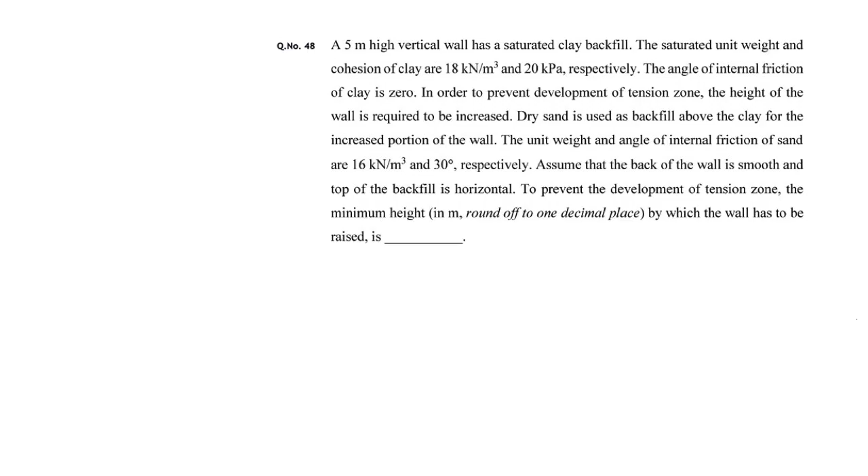Today, let's see a question from GATE 2020, and this question is from soil mechanics, which is a very important subject. But here, I just want to talk about something in general.

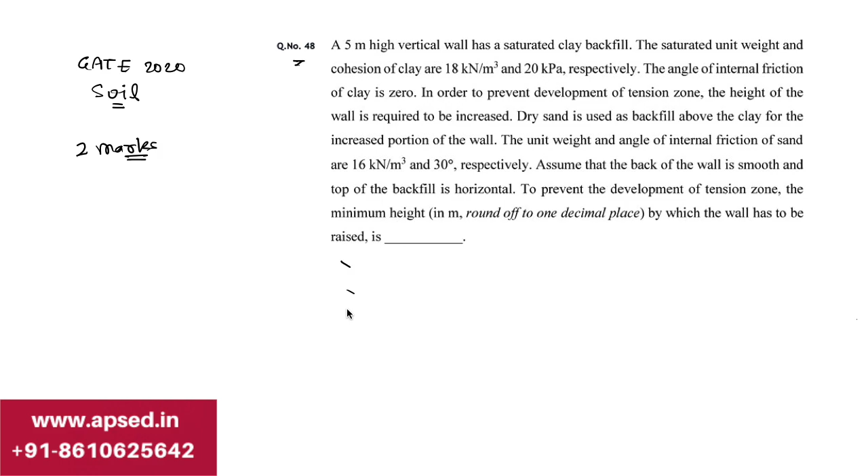The question can be from any subject, but in GATE, if you see the 2-mark questions in general, a lot of these questions are very lengthy and there are no options also to tick from. So these fill type questions that are coming in recent years, a lot of these are very lengthy in nature, and that can be very overwhelming when we are sitting in the exam with immense pressure to solve a lot of these questions.

So to tackle that situation, it is very important that we develop the skill of reading and understanding the question, because such long questions, if you are not reading properly, or if you are already assuming that it is a very difficult question because it is such a large question, any sort of assumption if you make even before reading the question, that may result in lack of confidence or doing some mistake. So that can all happen.

So the very important skill required here is: don't try to read the question in a hurry. Reading the question and comprehending it is a very essential part in solving it. If you have spent enough time reading and understanding the question properly, maybe you will take only a minute or less to solve it. But if you have not read the question properly, the chances are very high that you may end up making a mistake, or you may find the question very difficult.

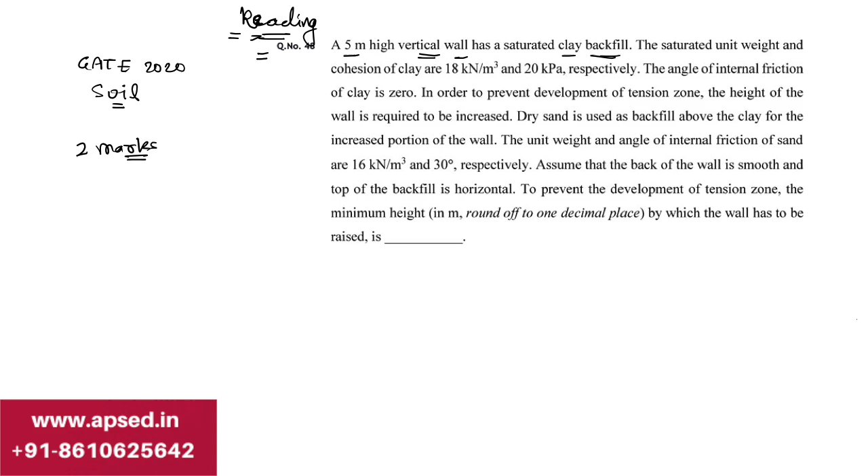So if you have studied soil mechanics, from here you can figure out that this question is from the retaining wall topic. You would know that generally in retaining wall topic questions, a diagram is given, but here the diagram is not given. For solving these questions, drawing this diagram is very important. If it is a question from retaining wall, make sure you draw a rough diagram - it helps a lot in solving the question.

So here it says it is a 5-meter high retaining wall and it has a saturated clay backfill. So the height of this wall is 5 meters and the backside soil is clay - saturated clay. The saturated unit weight and cohesion of clay are 18 kilonewton per meter cube and 20 kPa respectively. This next sentence is just telling us more information, that is the unit weight of this clay and its cohesion. So unit weight gamma is given as 18 kilonewton per meter cube, and cohesion is 20 kPa kilopascal, which is also 20 kilonewton per meter square.

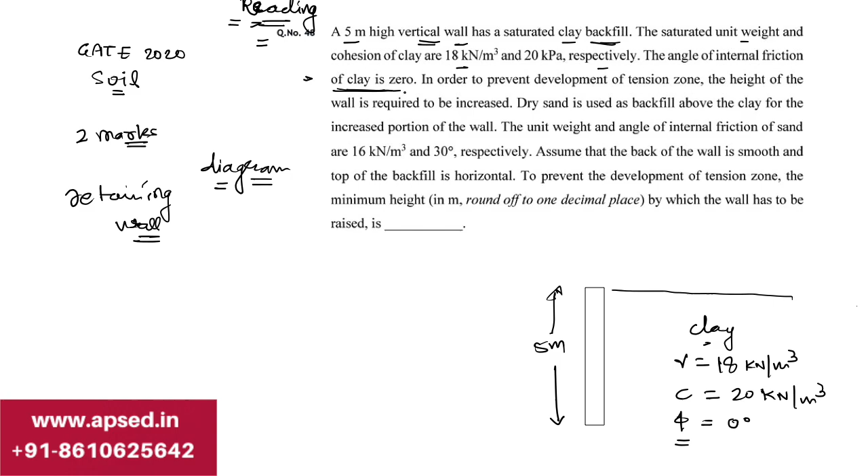The angle of internal friction of clay is 0. Even in general, if this was not given, we would have assumed the angle of internal friction to be 0. But here, this gives this additional information also - this may not always be given. But you can see that if the question is long, it can have such information also. It can be very clear in its language, so you don't have to get scared or intimidated by such questions.

The next line says, in order to prevent development of tension zone, the height of the wall is required to be increased. If you have studied earth pressure or retaining walls, you must know that for C-phi soil, when talking about tension zone, this forms only in case of active earth pressure. If it was passive earth pressure, there would be no tension zone.

This active earth pressure for C-phi soil is given as gamma z Ka minus 2c square root of Ka. This term would not be there if it was just a cohesionless soil. So that is one difference.

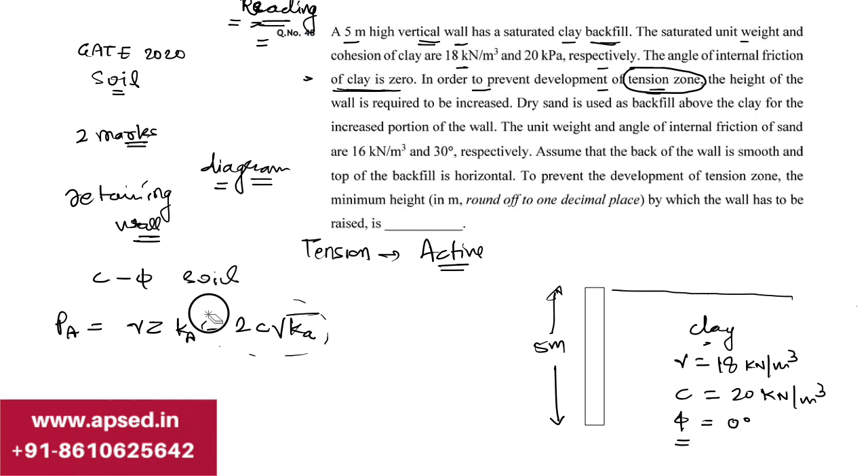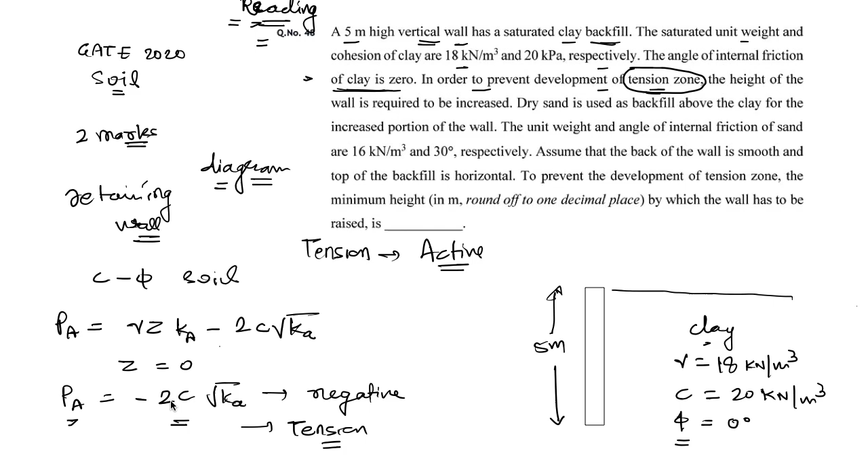In this equation, if we find the active earth pressure at z equal to 0, this value comes out to be minus 2c square root of Ka, which is negative. This negative sign indicates a tension zone. Negative earth pressure means it is in tension, and only after some distance does it become 0, and then if depth is sufficient, it becomes positive.

So for this soil, if we draw the earth pressure diagram, it comes out like this: at top it has a negative value of minus 2c square root of Ka, and at the bottom it will be the net value of gamma z Ka minus 2c square root of Ka. That is this part of the language in the question. I had to explain a bit about this tension zone. Now let's go back to reading the question.

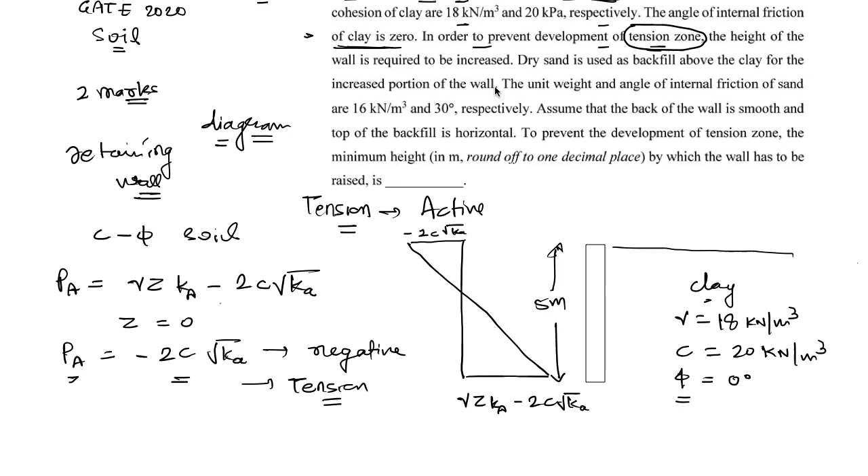Now it says dry sand is used as backfill above the clay for the increased portion of the wall. Earlier it said the height of the wall needs to be increased, so this height has to be increased, and as a backfill, in this part we are filling clay, and in this other part we are filling sand, with the purpose of preventing the development of tension zone. It should be filled so that this negative part in active earth pressure does not occur. Then details about unit weight and angle of internal friction are given.

Unit weight is 16 kilonewton per meter cube, and angle of internal friction is 30 degrees. Assume that the back of the wall is smooth and top of the backfill is horizontal. These points are given: back of the wall is smooth, meaning we can use Rankine's theory, because in Rankine's theory we assume a smooth wall, whereas in Coulomb's theory the back is not assumed smooth, we consider roughness. But in GATE we only have to cover Rankine's theory. So this line gives a hint about that.

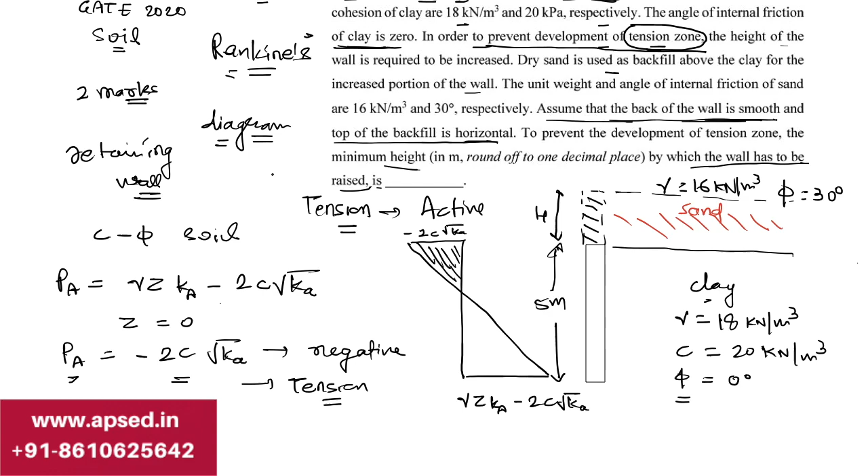To prevent the development of tension zone, the minimum height by which the wall has to be raised is asked. It's asking what should be the increased height of this retaining wall so that this tension zone does not appear. You can see each of these lines had a purpose, giving us a lot of information about the current situation and what change is required.

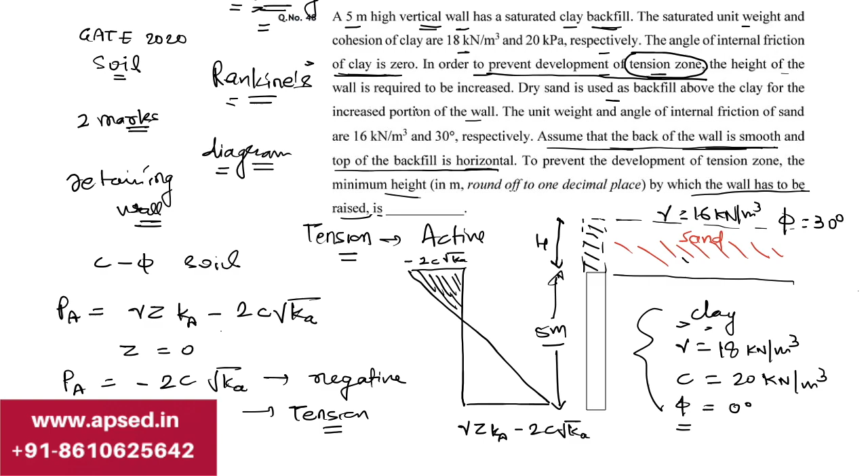The current situation is that there is a 5 meter vertical wall with clay, and when we just have clay, there is a tension zone which we want to avoid. So above this, sand is being filled in such a way that this tension zone does not appear, and all this information we are getting just from the question. Now we can go for the solution part.

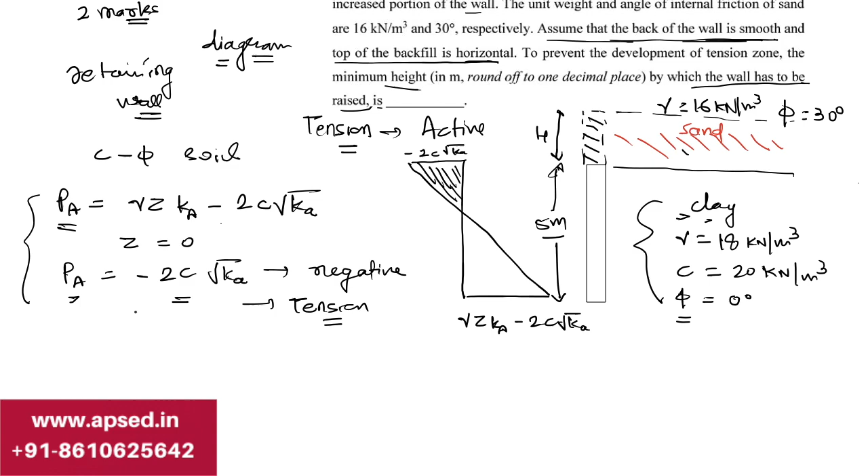So already I started with this explanation. If you have already covered this topic, you will not have any difficulty with these formulae. So if we write the value, at z equal to 0, Pa will be minus 2c square root of Ka, and this coefficient of active earth pressure is given as 1 minus sine phi upon 1 plus sine phi. Phi is given as 0 for this clay part, so from that, Ka is equal to 1.

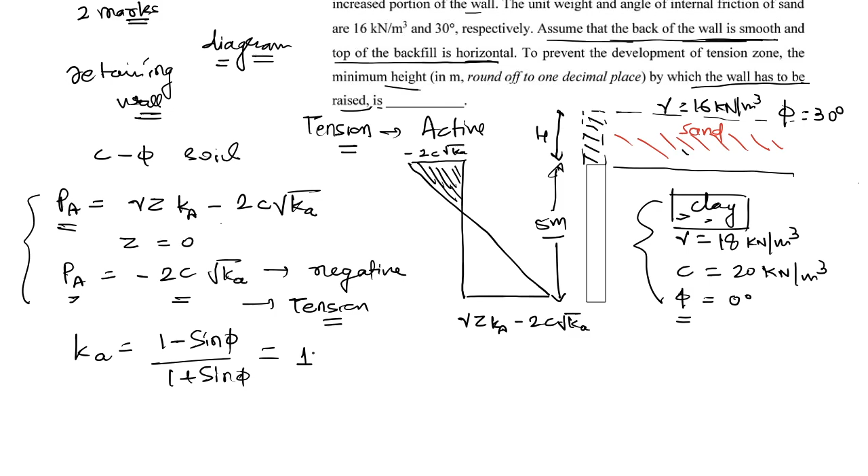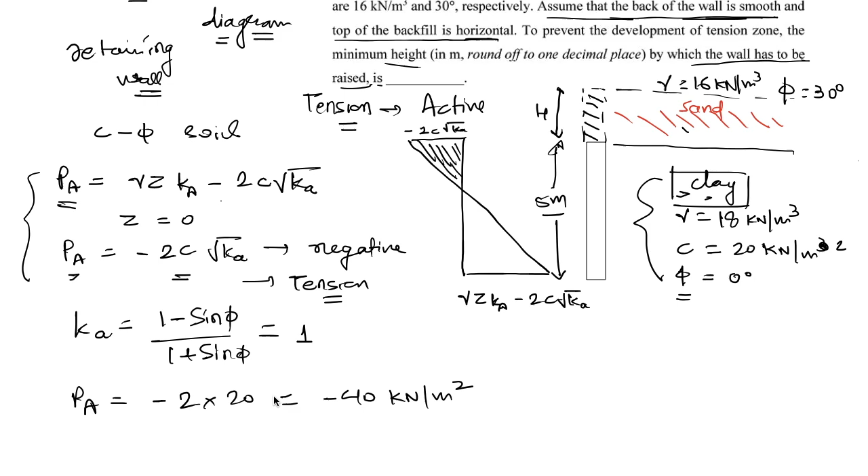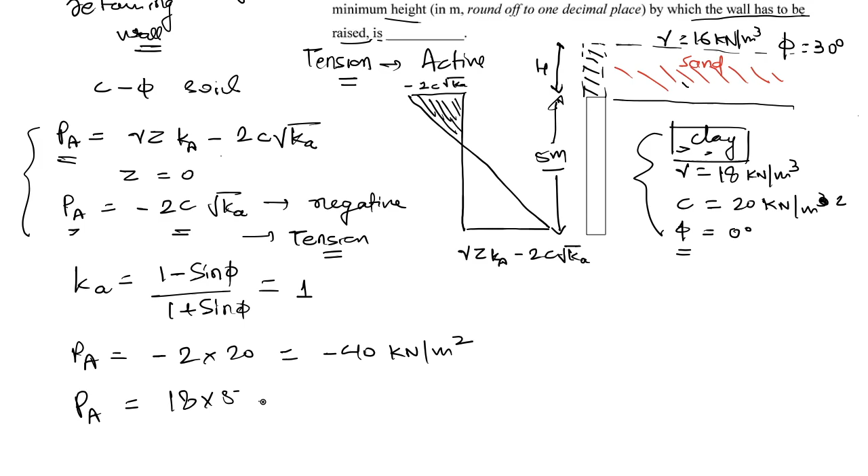So at top of the clay, active earth pressure comes as minus 2 into C which is 20, so that is minus 40 kilonewton per meter square, not meter cube. Then at the bottom, at 5 meter, this value will come as gamma z Ka. Gamma is 18, z will be 5 meter, Ka is 1, minus 2 into C, that is 2 into 20. Again Ka is 1.

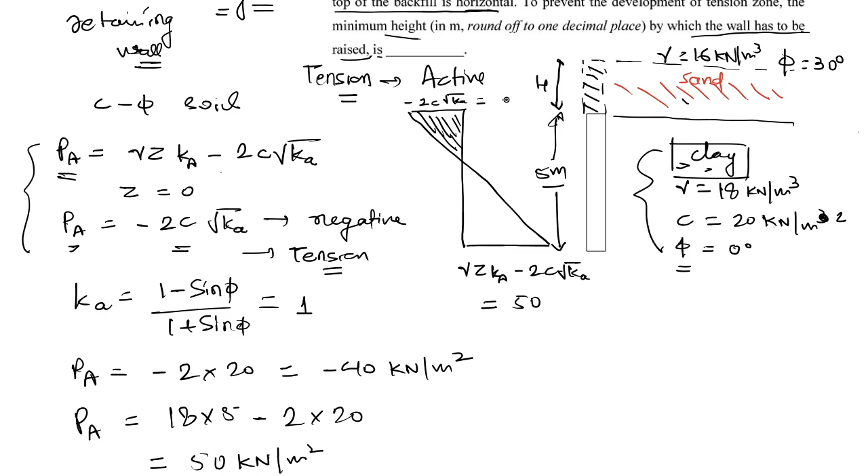So this value comes out as 50 kilonewton per meter square. So here this value is 50, here this value is minus 40, and if we put Pa equal to 0 in this equation and solve for Pa equal to 0, we can find out Z as 2C upon gamma, that is 40 upon 18, which comes as 2.22 meter.

This part is not required for the question, but just for your knowledge, I have also shown how we can calculate the point where this active pressure is 0, or the point where it is changing from tension to compression. Now after this point, this is the first part of the question, that there was this clay backfill, and because of that there is some negative pressure.

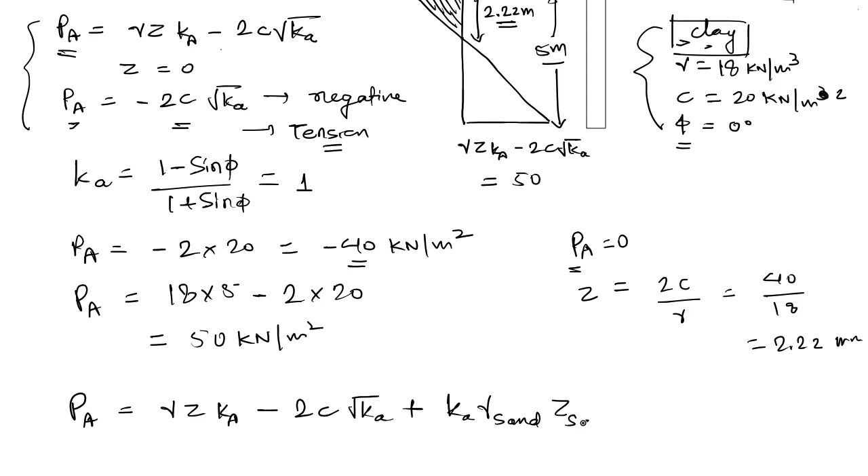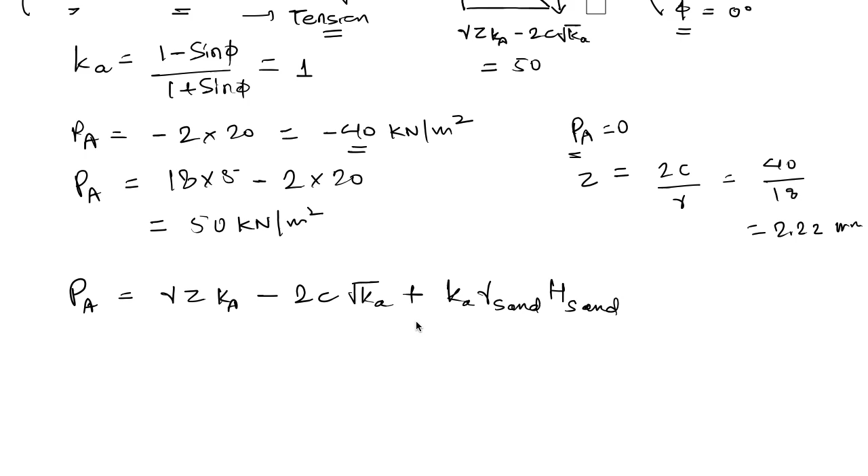Now the second part is that we are filling the sand. So what will happen due to this sand fill? The equation of earth pressure will become gamma z Ka minus 2c root of Ka, plus Ka gamma sand and Z sand. Z sand we have taken here as H, so this we can write as H. So this will be the change in the equation.

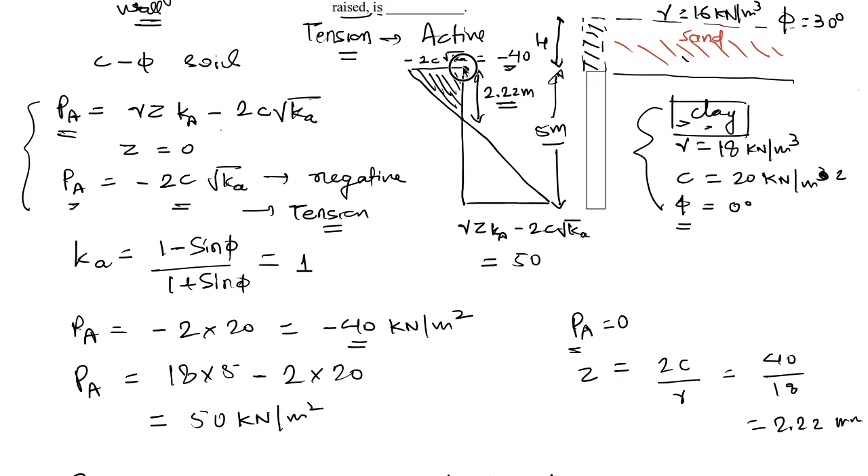Now this sand should be filled in such a way that instead of this negative value at the top of this clay, this value should be 0. So when Z is equal to 0 in clay, this Pa should be equal to 0. That was the core concept for solving this question. So at this point, this Pa should become 0.

So here these values are gamma into Z. So for clay, 18 into 0, because at Z equal to 0 we are checking, minus 2 into C. So 2 into 20, plus Ka gamma sand and H sand.

Now which value of Ka should we take? Should we take the Ka in the clay part, or should we take the Ka in the sand part? So when we have such interfaces, when we talk about earth pressure and we have such interfaces, then we have two values of earth pressure. If we were seeing the earth pressure in sand at the interface, then we'll use this Ka of sand. But here we are checking this value in the clay part. This tension zone is developing in the clay part. So in writing this active earth pressure, we'll take the Ka coefficient for clay.

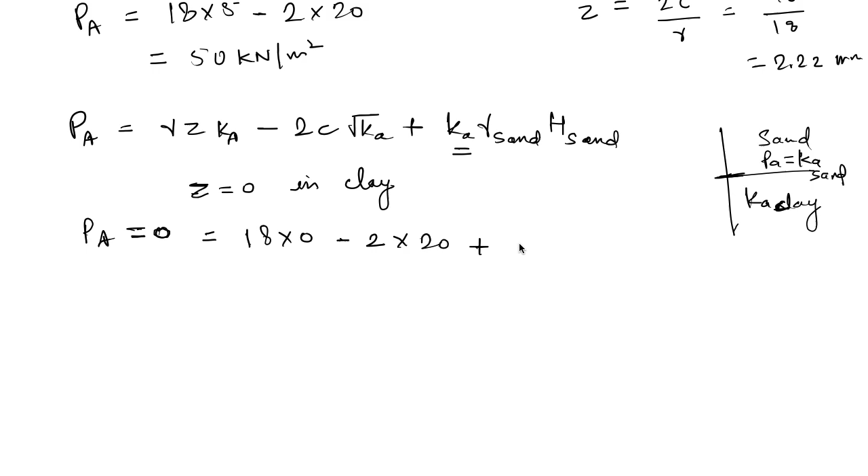So that is simply 1. The unit weight of sand is 16, and H, that is the height by which the wall has to be raised, that we have to find out. So if you see here, we are getting 2 into 20 by 16, that is 40 by 16, or 2.5 meter.

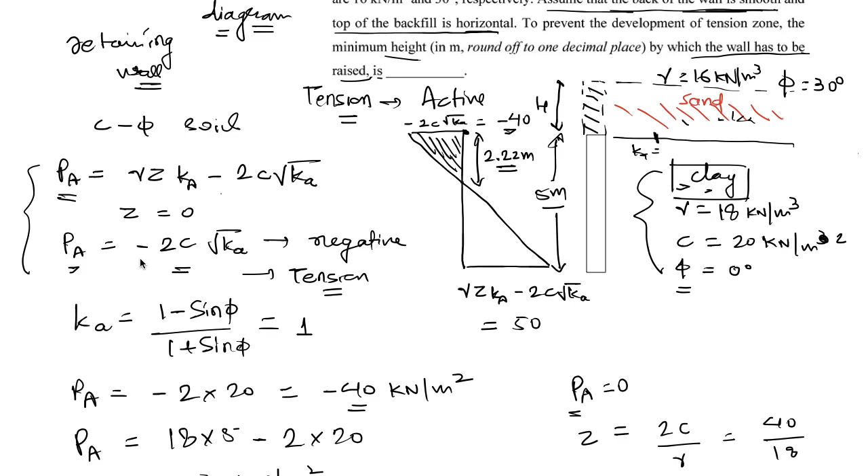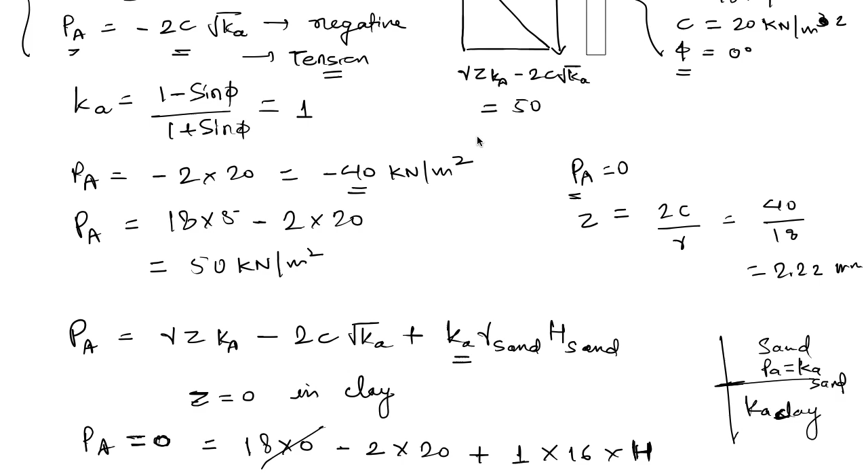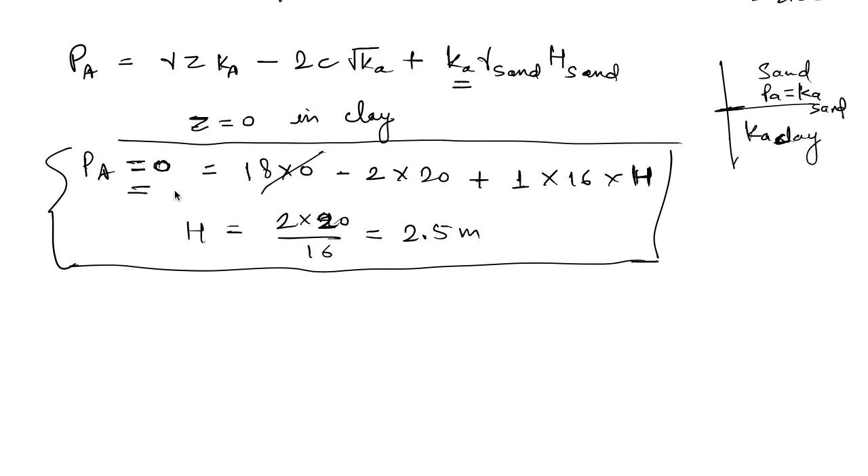Now here it may seem to you that this question was not so small, but if you already know what this language was suggesting, once we were done reading, the question was only about these two lines. This was the solution of the question. The rest I have given to revise this active earth pressure, but this is what the solution for this question was—that active earth pressure at the interface of clay and sand should be 0, and we just put the value accordingly to obtain the increased height of this retaining wall.

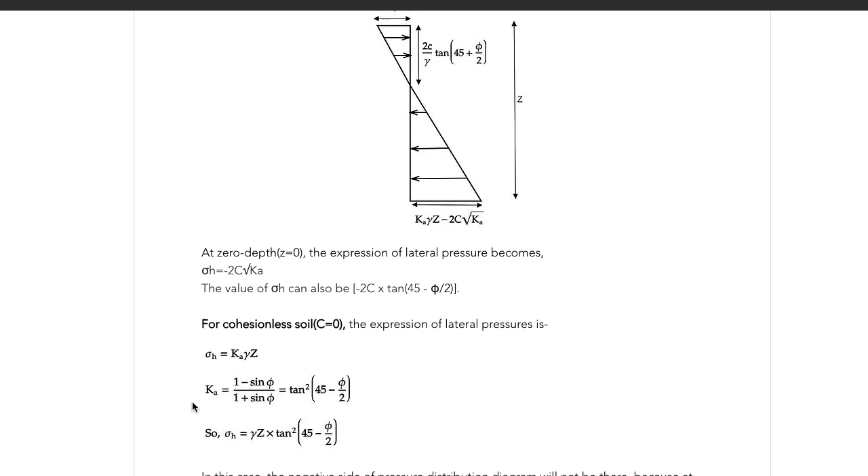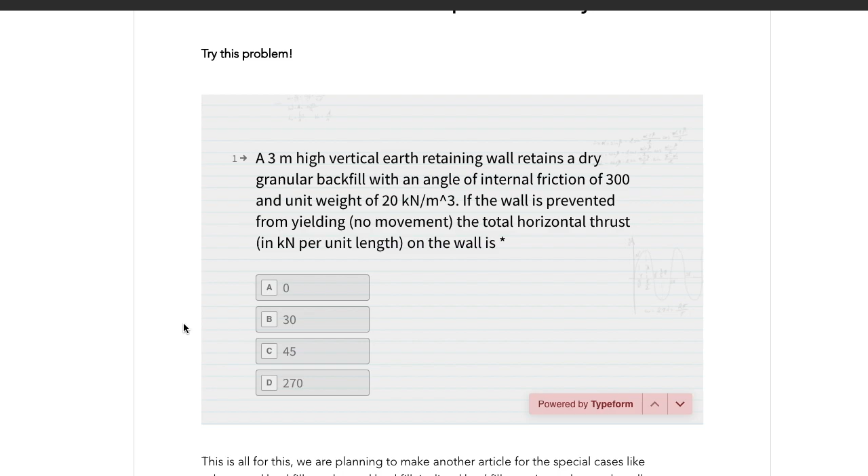So this is to give you an idea that reading or comprehension skill in the exam are very important. It is as important as the knowledge of the concepts and your understanding of the subject. You should give sufficient time in reading the question. Don't hurry about it. Give it sufficient time and get the data clearly. Write it in your notebook, whatever data is mentioned. If some small diagram is required, like I said, when we are solving these retaining wall earth pressure questions, we need to draw the diagram. It really helps in solving the question. So do all these required things and it will make sure you solve the question correctly.